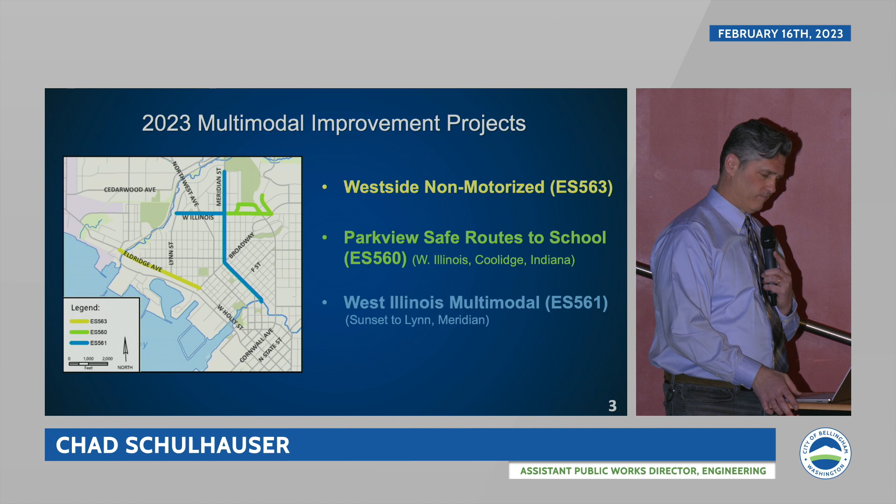So the first project, the Westside Non-Motorized project, will be at Chris Como's table tonight, off to my left. This project has a few different components. One of the components includes improvements to 17 intersections and crossings, focused mainly on the west side of the city, and 15 of these will be enhanced with rectangular rapid flashing beacons. I'm just now realizing I was pointing to Chris, but it's actually Jessica Bennett at the back of the room, the project engineer on this project, who can discuss it in greater detail. All of these crossings were identified in the pedestrian master plan, which was created in 2012.

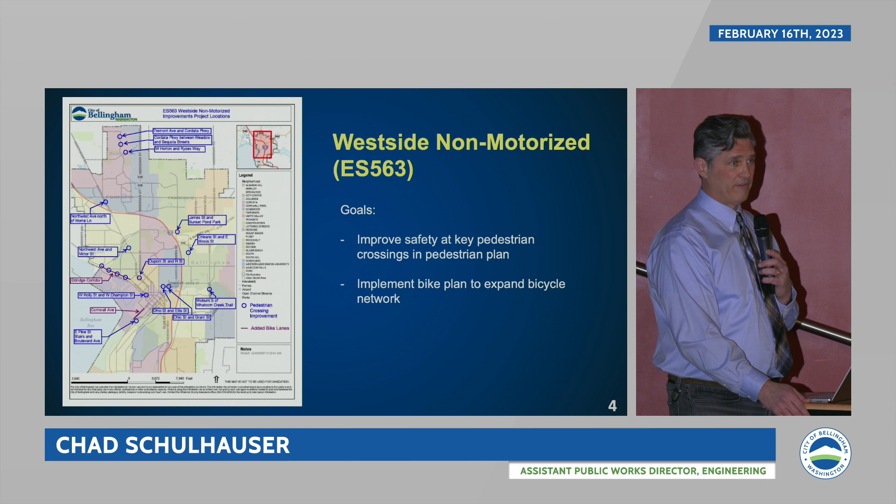As you can see, these crossings are basically on the west side of the city, going from north to south, with a few on the other side of the freeway, and we've got lots of details on those. Like I said, 15 of those will be enhanced crossings marked with rectangular rapid flashing beacons, which I'll go into more detail on a little later.

Another component of this project includes improvements on Eldridge Avenue between Broadway and Squalicum. This project will add buffered bike lanes to Eldridge together with shared lane markings, also known as SLMs or sharrows. The sharrows on Victor and West streets basically mark the bike boulevards, which are right up here.

There are existing sharrows marking a bike boulevard along Monroe Street at this point in time. These additions will complete the bike boulevards identified in the bicycle master plan and connect the bicycle network previously established with Squalicum Way. The Illinois Street project, which I'll talk about later, will establish bike lanes and create more of our bike network, which will also be connected via these sharrows and bike boulevards.

We're also coordinating with WTA, our local transit authority, on this project to consolidate some bus stops along Eldridge and bring them up to ADA standards to make them easier to access.

Finally, at these four intersections shown here - Lafayette, Squalicum, West, and Victor Streets - the only marked crossing out there right now is at Victor at the park. We will be marking those four crossings as well as installing RRFBs, the rectangular rapid flashing beacons I mentioned earlier, to create and enhance those crossings. This will result in, between Broadway and Squalicum, five crossings that are either enhanced or signalized, like the one at Broadway that exists right now. So basically that entire corridor will have crossings about 1,000 feet away from each other.

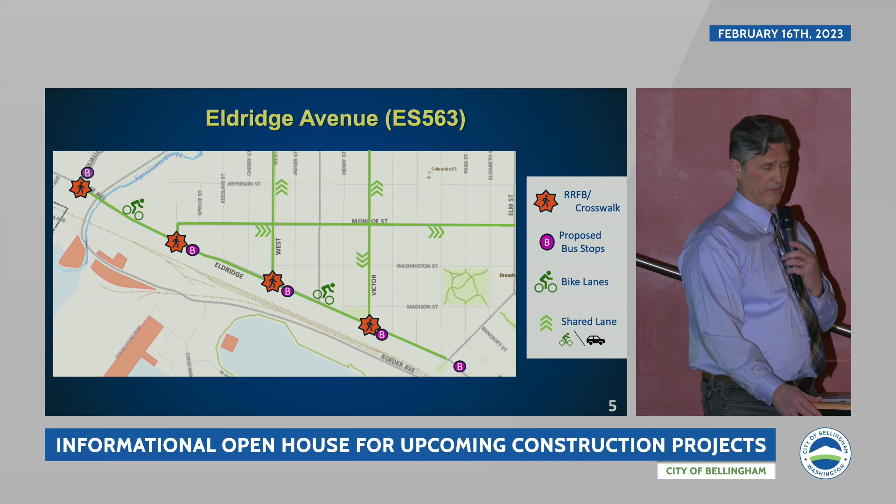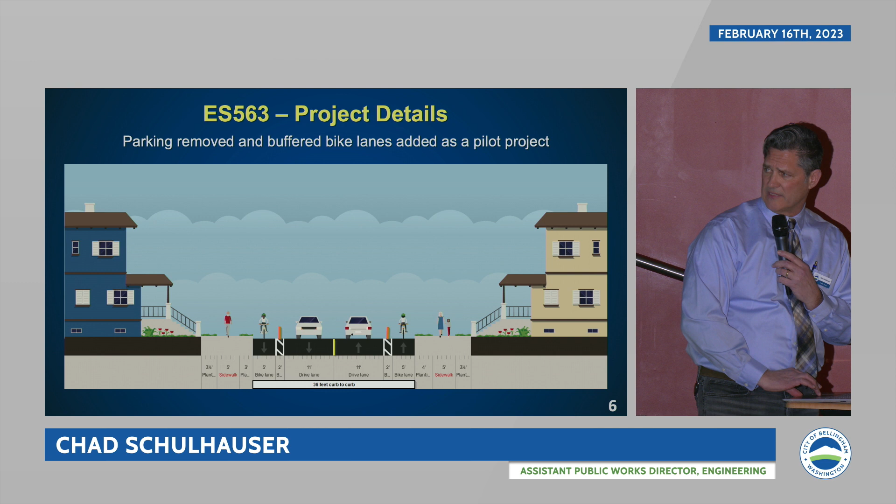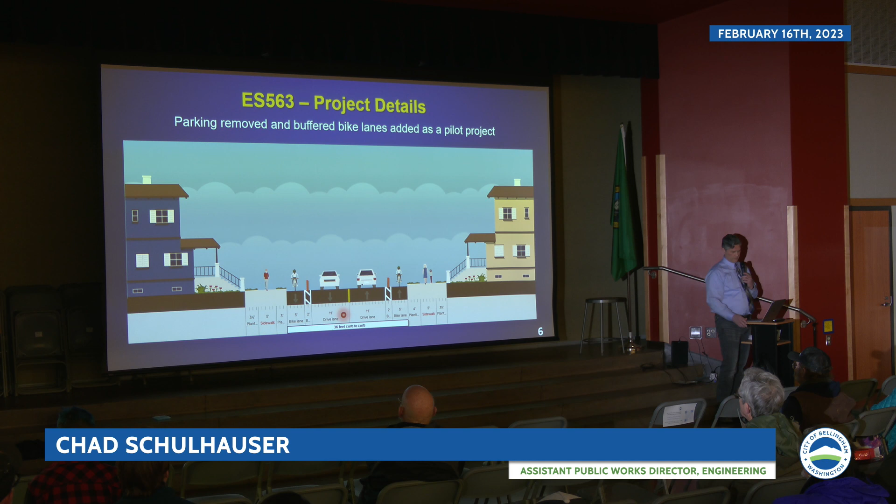We're anticipating that the buffered bike lanes and the delineators will visually narrow your driving lane. Right now there's 18 feet per lane from curb to curb, and 8 feet of that is a parking lane, but parking is very underutilized out there. So by installing these, we anticipate that speeds will be reduced over there, and I'll get into more of the project and our reporting on that in a little bit.

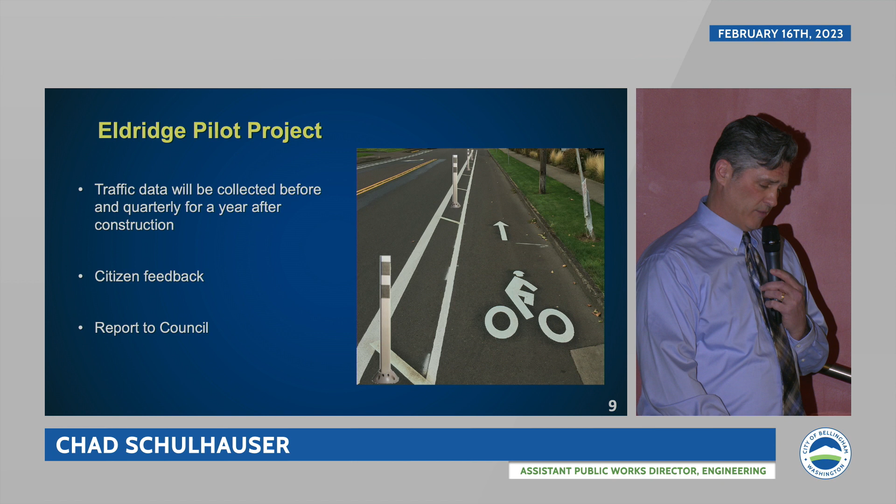This is an example of what the buffered bike lanes will look like on Eldridge when we're completed. It's very similar to what happened out at Cordata a couple years ago - we'll have the bike lane separated with a buffer painted on the ground, as well as vertical delineators, or stanchions, which will be very visual and keep vehicles out of those bicycle lanes, which are specifically for bicycles. The Eldridge project is planned to be a pilot project, and we'll be collecting data.

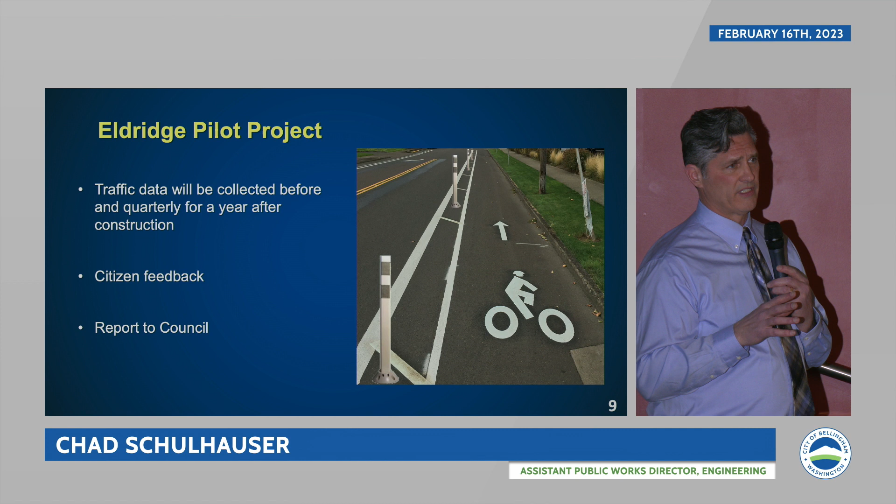This project will be under construction this summer. Before we go under construction, we will be collecting data on volumes and users, bikes and vehicles, pedestrians, as well as speeds. We'll also be collecting that data quarterly, and we'll be reporting back to council on the outcome of this project. Has it resulted in our expectation of reduced speeds?

And we'll need to report back on that. There will be links on our website when this project is underway, email lists, as well as we'll be looking for input from the users of this corridor or the residents out there. We value that information because that's what we need to report back to council on, and it helps us design projects in the future.

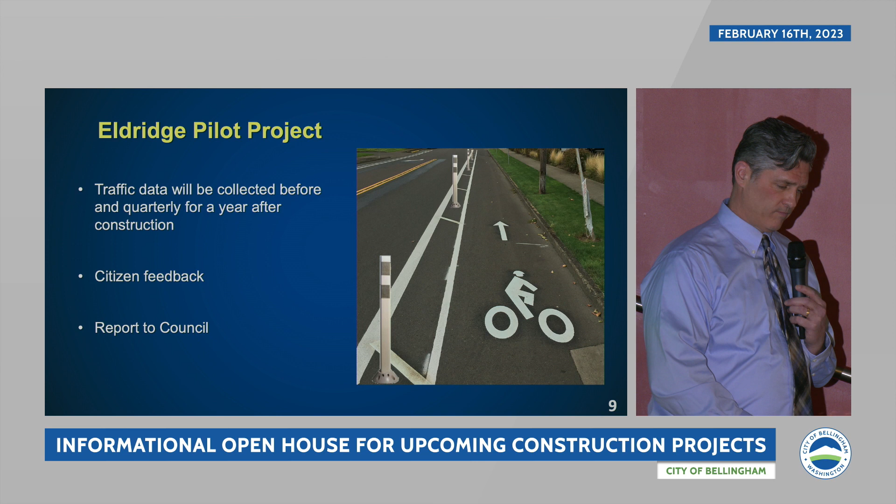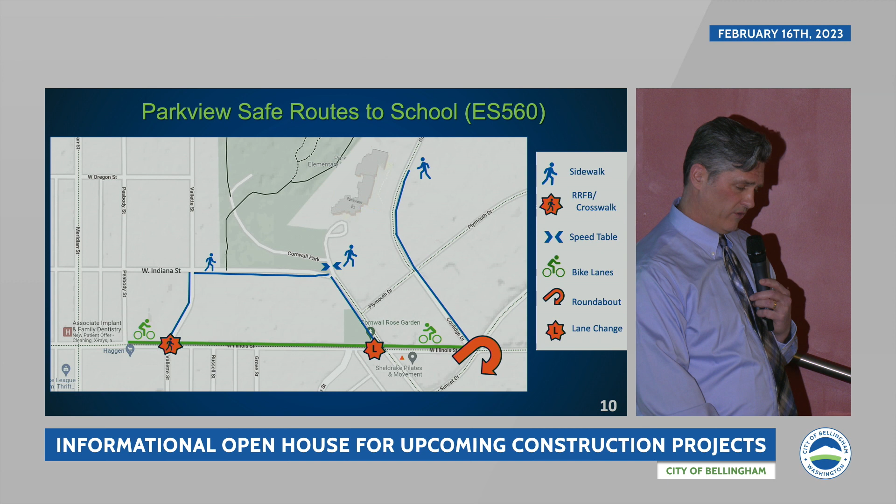The next project is the Parkview Elementary Safe Routes to School project. This project includes sidewalk improvements on Coolidge, Cornwall, Indiana, and Villette Streets, and new bike lanes on Illinois between Sunset and Peabody. We'll also tee up, or make perpendicular, the intersection of Indiana and Cornwall Streets. That's that sweeping curve there right now. We just want to tee it up like a typical intersection, slow people down, put a sidewalk and stop signs in there, make it a little bit safer.

Additionally, we're going to install a roundabout at Sunset, Coolidge, and Illinois. This is that odd 5-leg intersection in the city where 2 of the legs are basically controlled, either one way or bikes only. We'll be installing a roundabout there. We've also got an RRFB to install at Villette Street, and we'll be revising a number of the curb ramps at Cornwall and Illinois. That intersection, we'll be installing smaller radii in there to get rid of some of those sweeping curves and slow down the turning traffic at that intersection.

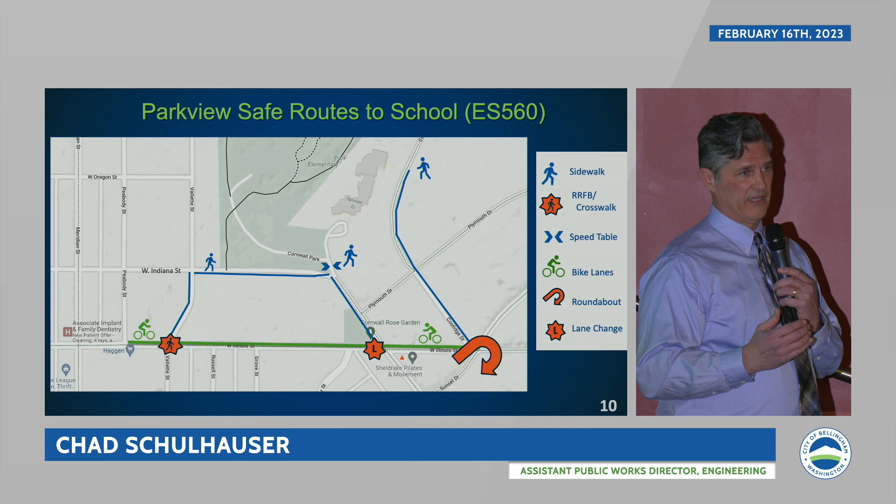These improvements are all designed and constructed, like I say, as part of the Safe Routes to School program, which is a granting program offered by the federal government. These improvements are done in partnership with the school district, and we partner up on those to apply for the grants. They fund partially the money, and the city comes to the table with money. We get the federal government to come to the table with money, and then we make projects like this happen.

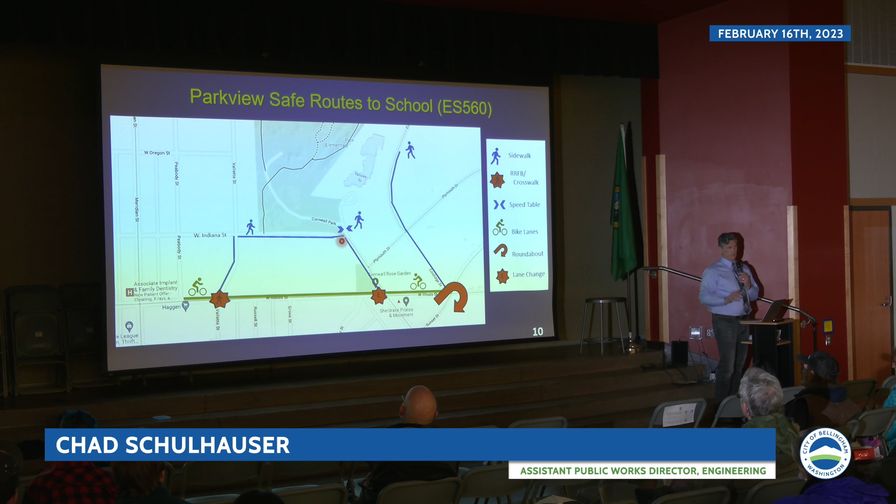I want to be really clear that the Safe Routes to School is a funding program, and it's the title of this project. These are all done on the school district's designated walking routes, which they're obligated to produce for all of their schools in the district, showing a 1-mile walking radius to the school. These improvements will provide sidewalks, bike lanes, and various other amenities on those designated walking routes. The Safe Routes to School is a funding program, and I just want to be really clear about that. We're not creating safe routes to school. I can't do that. That's all kind of a subjective thing.

So, just a couple of examples. I'm sorry, you know what? I'm going to go back here for a second.

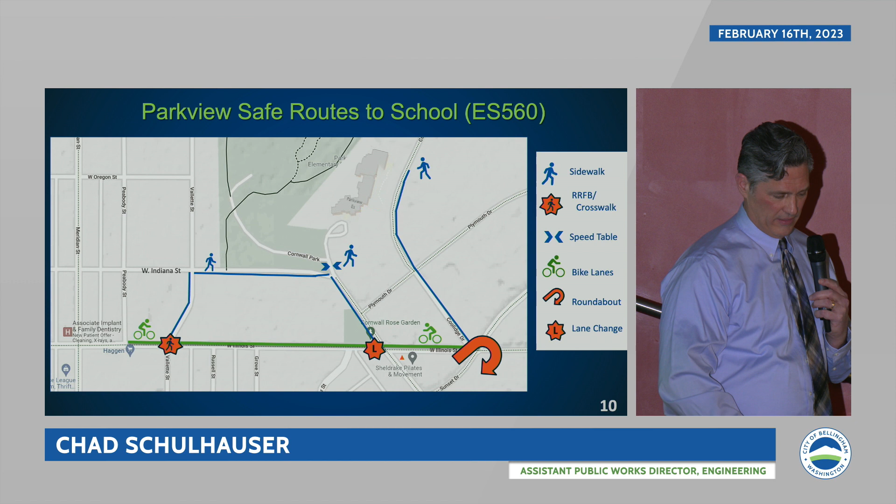One of the other things we're doing is the existing crossing out there on Cornwall at the entrance to the school district. We're going to turn that crossing into a speed table, which is an elevated crosswalk. You've seen that if you've been down to the waterfront area when we constructed Laurel Avenue. That's an elevated crosswalk, a speed table, which basically provides crossing at grade at the curb level and slows vehicles down. Not as harsh as a speed bump, more like a speed hump, but just an elevated crossing.

Additionally, this is where that crossing will go. This is that entrance, what I talked about in terms of teeing up that Indiana-Cornwall intersection, just making it perpendicular, so it'll be stop controlled on the Indiana leg of it, and then we'll have the sidewalks and curb ramps and crosswalks completed in there.

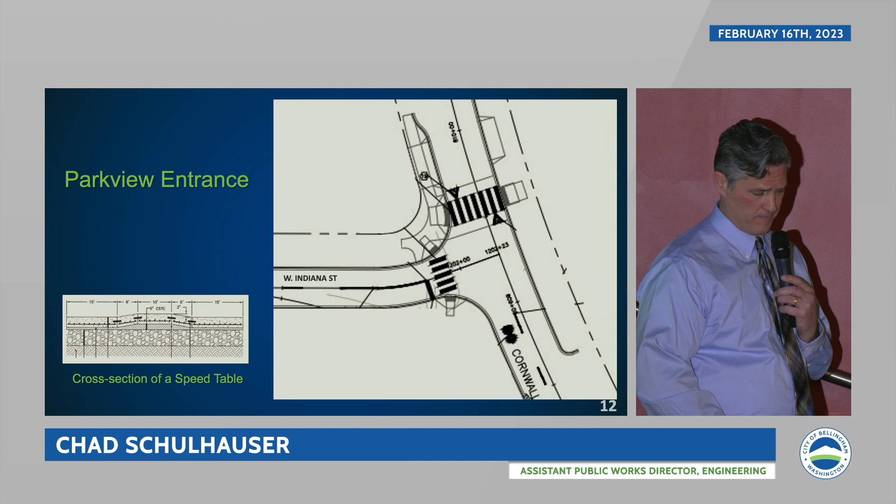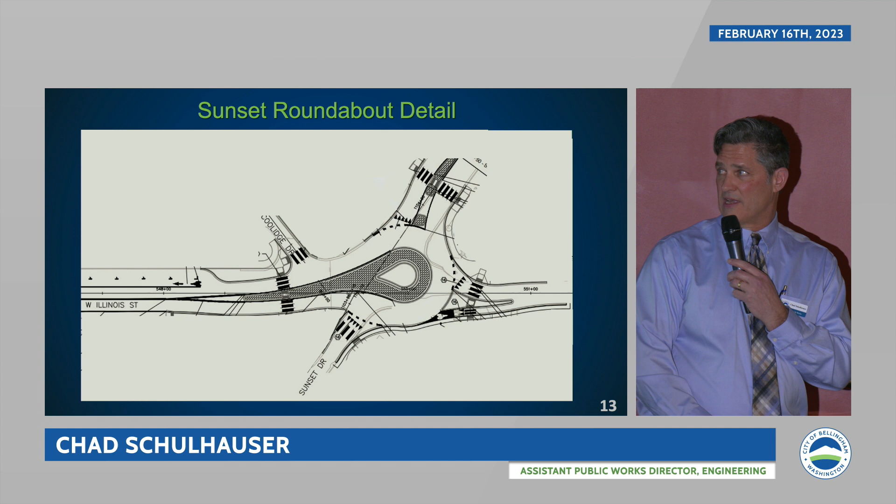I also talked about the roundabout at Illinois and Sunset. That's, like I said, a little bit funky. It's not a true circular roundabout, but we have to do different things when we've got 5 legs at an intersection, and that will be under construction with this project.

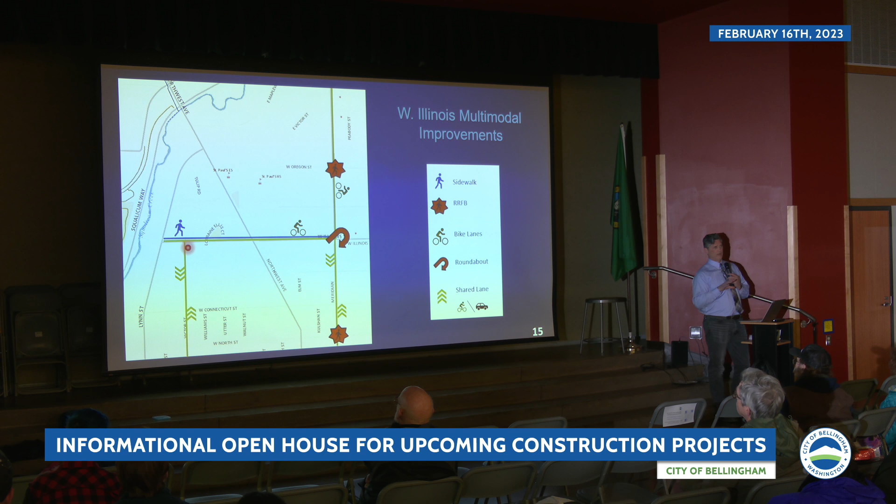Additionally, we've got kind of what I mentioned at the first project. The Westside Non-Motorized project will install sharrows along Victor Street from Eldridge, going all the way up to Illinois. Once that project is done, along with this project, basically there will be bicycle infrastructure connecting much of our city and implementing much of our bicycle master plan.

You can get on a bike on the north side of Lake Whatcom in the Britton area, almost at the eastern city limits, and ride on trails or bike lanes or bike boulevards all the way to the west side of the city, heading down to Squalicum Parkway, or getting on Eldridge and heading into downtown, or out to Whatcom County along Marine Drive in bicycle facilities. That's one of the things we're really excited about, is just those connections that we're making.

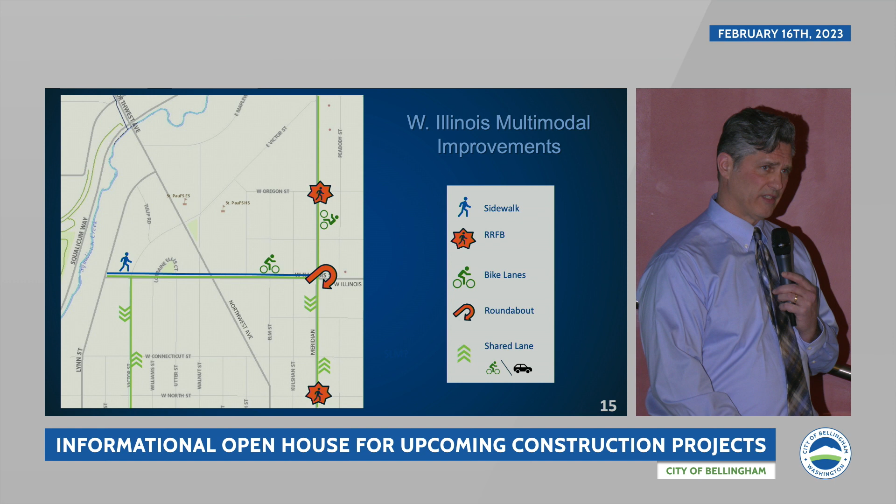This is further down Girard. We will pick up the bike lanes again south of Broadway and take those all the way into the Civic Center to make those connections.

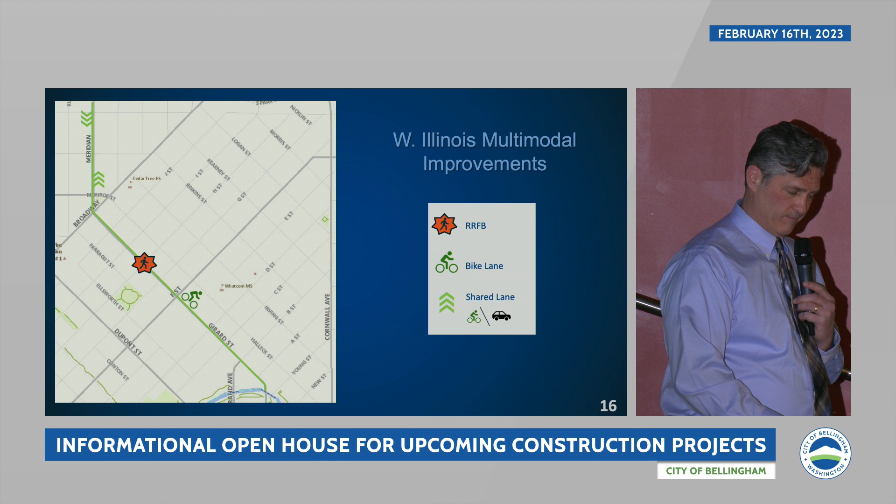And then finally we've got the mini roundabout, and I'm sure a lot of you are thinking, wait a second, how are they going to put a roundabout at Meridian and Illinois? There's way too little space in there. This is a mini roundabout, which basically means it's got a much smaller interior diameter. It's single lane traffic around it. It's not the roundabouts you're used to seeing on Cordata or out at Northwest or Wharf Street.

This roundabout, we are restricted by the amount of right-of-way. The buildings on the west side of this intersection are right at the property line. There is no more right-of-way available. So we are going to install this roundabout to take down the signal, and eliminate the maintenance of that.

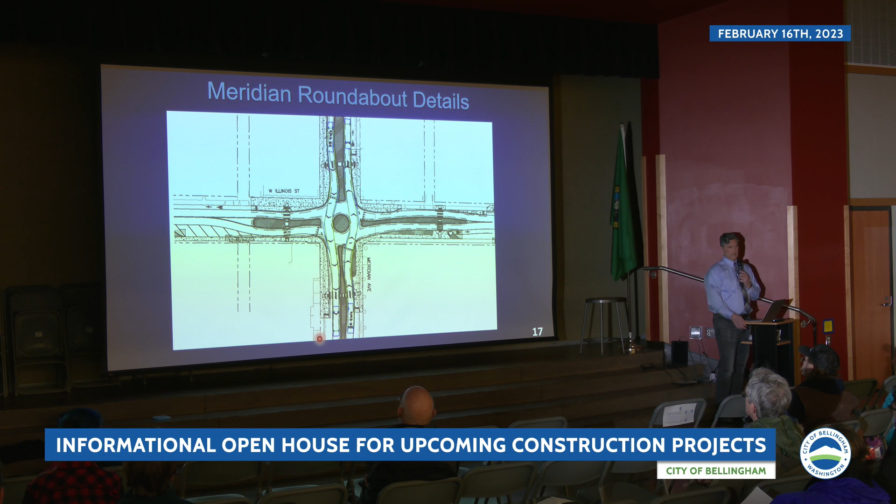We also, with the roundabout, move the crossings further away from the intersection, reducing those conflicting turn movements and making safer crossings out there. And we expect it to function very well and keep all modes of traffic moving through that intersection.

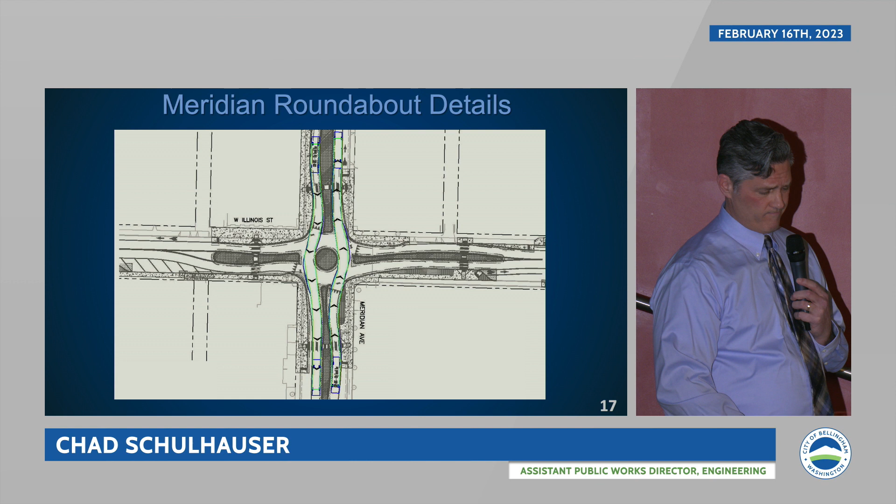And that's really it for the general presentation. Thank you very much for your time.